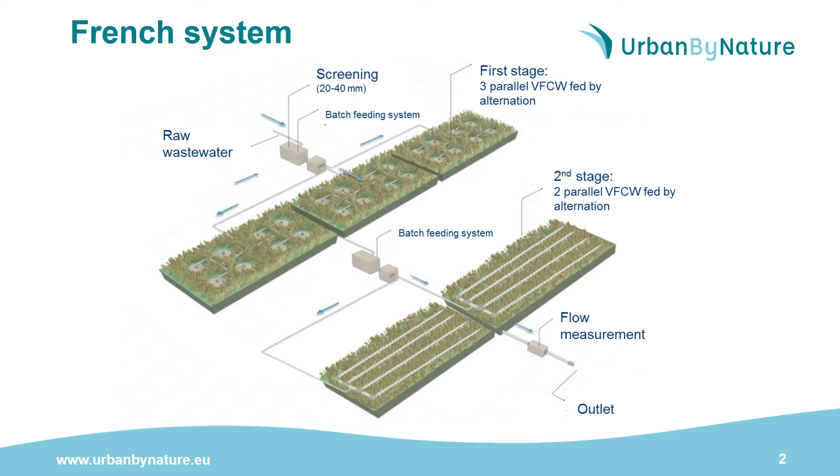So there are more than 5,000 systems in France working for communities, with more than 30 years of experience for the oldest one. One of the particularities to manage these organic deposits that develop on the first stage is that we need to alternate between feed and rest periods to be able to mineralize the sludge. And so in temperate climate, where we have 3 filters in parallel, we will have 3 days and a half feeding and 1 week of rest for each filter.

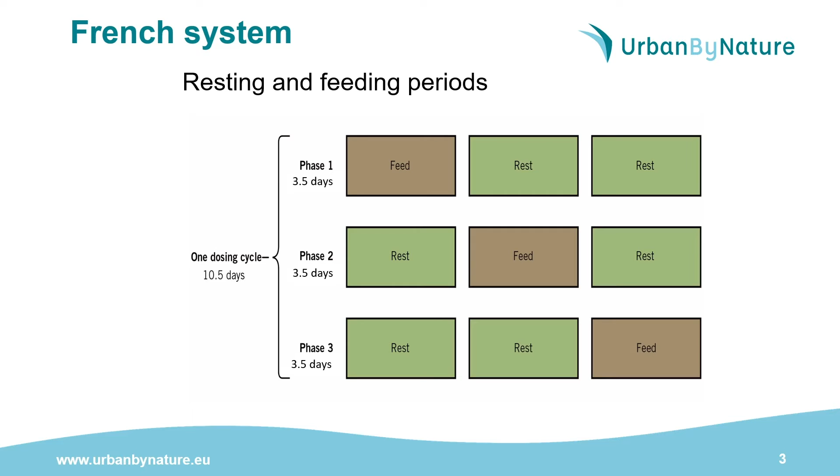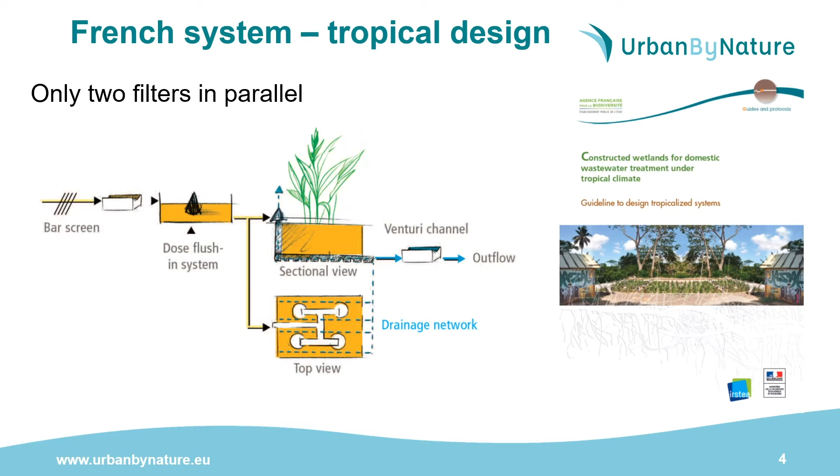But in tropical climate, there are only 2 filters. As you can see in this figure, thanks to the warmer temperature all the year, we can decrease the surface of the system. Even if performances will be higher than in temperate climates, if we do not have too stringent outlet requirements, we can work with only 1 stage in many cases. So there is a guideline about the different variants of French system in tropical climates that you can download on internet.

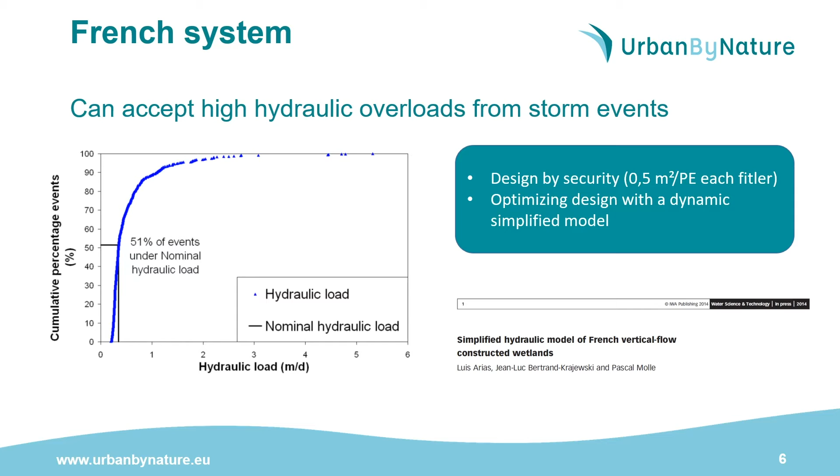So to design the system to accept hydraulic overload for stormwater events, we can have a security factor, that means increasing by 25% the surface of each filter to accept huge load, or we can optimize the design with a dynamic simplified model that you can find in this publication that will allow us to better shape and design the filter.

What is very important is the particle size that we will implement in each filter. So there are different layers. A first layer which is important for the treatment, and then a transition layer and a drainage layer. And for the first stage, as we are working with raw wastewater, we need to work with specific materials, which is gravel, not too tiny, not too big, to be sure that the organic deposit will stay on the top, not too much inside the filter, and that aeration will be good enough to ensure aerobic condition for biological degradation. So basically on the first stage we are working with gravel, 2-4 millimeters, 2-6 or 3-6 millimeters, but not smaller and not bigger.

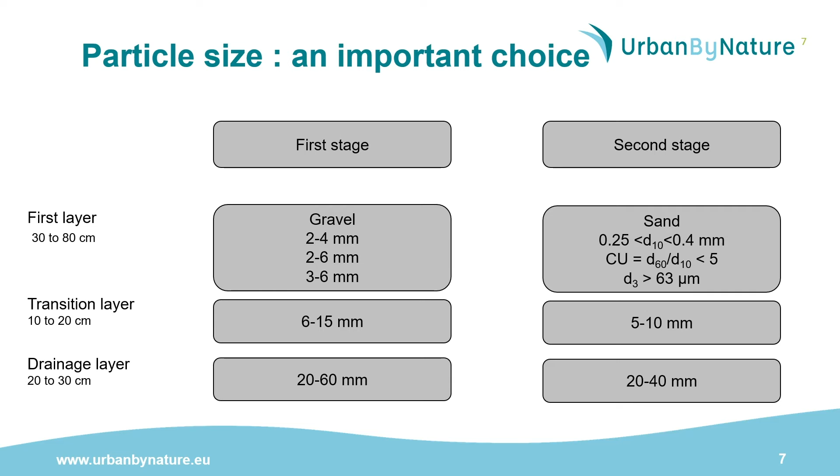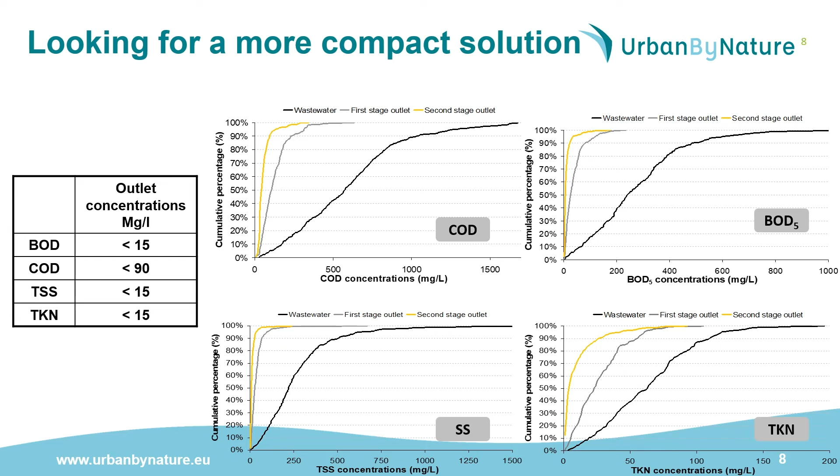The question we had behind that is: is it possible to improve a little bit the efficiency of the first stage to be able to work without the second stage? Because sand is sometimes difficult to find locally, and as well to decrease the footprint of the system and decrease the investment cost of the system.

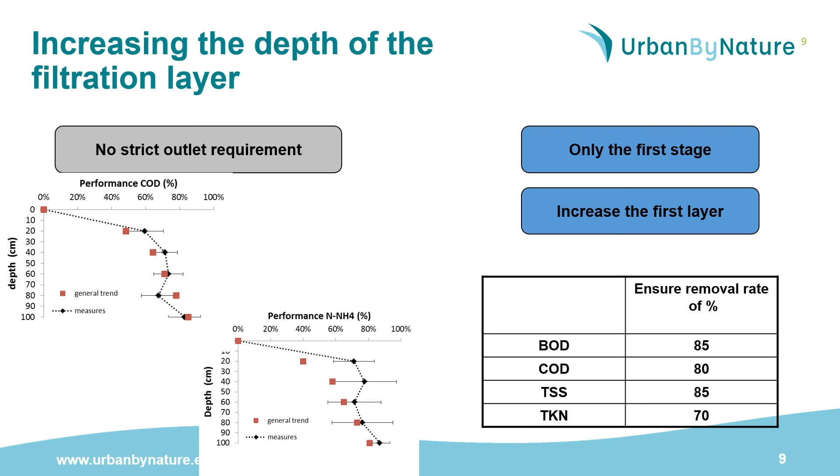So what we can do to improve the performances is increasing the depth of the filtration layer. And what we can see here is that performances for COD, dissolved COD and ammonia increase with the depth, but the main part of the treatment is done in the first 30-40 centimeters of the filter. And so if we increase the depth, we can improve a little bit or decrease the variation at the outlet, but not so much. So if we go to 90 centimeters of filtration layer, then we can ensure those performances for the first stage, but it's maybe not enough according to the context.

Another possibility is to make a recirculation from the outlet of the system to the inlet, and so we will increase the hydraulic load, obviously, but we will have a dilution effect in the effluent. And what we observe is that the performances of the filter itself stay the same as long as the hydraulic load stays below 70 centimeters per day.

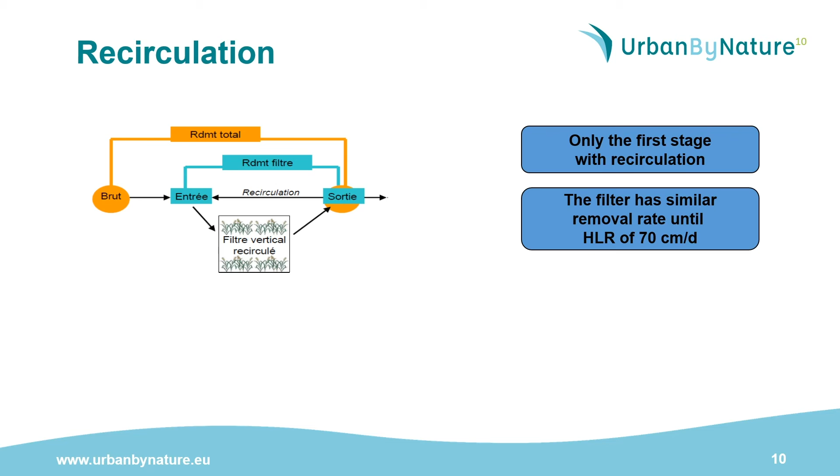If we design a system with 1.5 square meter per PE for the whole first stage and 100% of recirculation, then we can improve the performances of the whole system.

And here you have on the left a figure that presents, according to the inlet concentration, what we will get for Kjeldahl nitrogen at the outlet according to the inlet concentration and the recirculation ratio. So you can see, for example, if you enter at 80 milligrams per liter of Kjeldahl nitrogen, the black line in the middle, then if you do 100% recirculation, you can reach almost 20 at the outlet. But there is a zone that you do not have to go.

It's when the hydraulic load is higher than 70 centimeters, because in that case you have a clogging risk on the long term. But thanks to recirculation, you can ensure this outlet concentration, which is quite good in many contexts, but obviously nitrification will not be full. And as well, recirculation means electricity on the site.

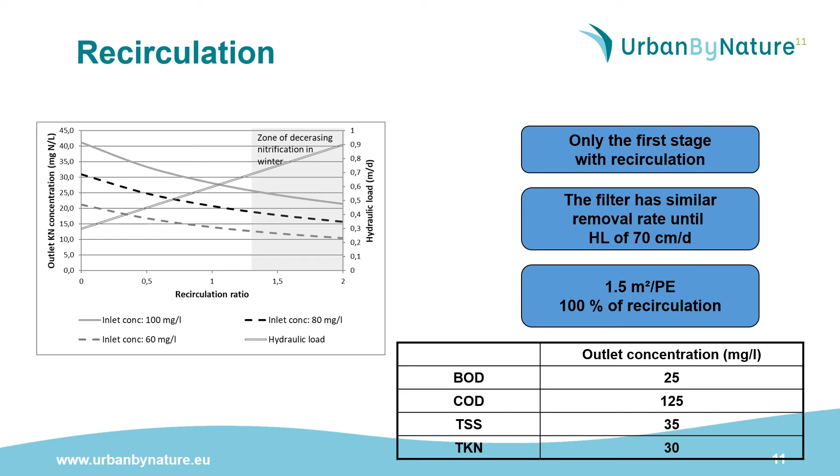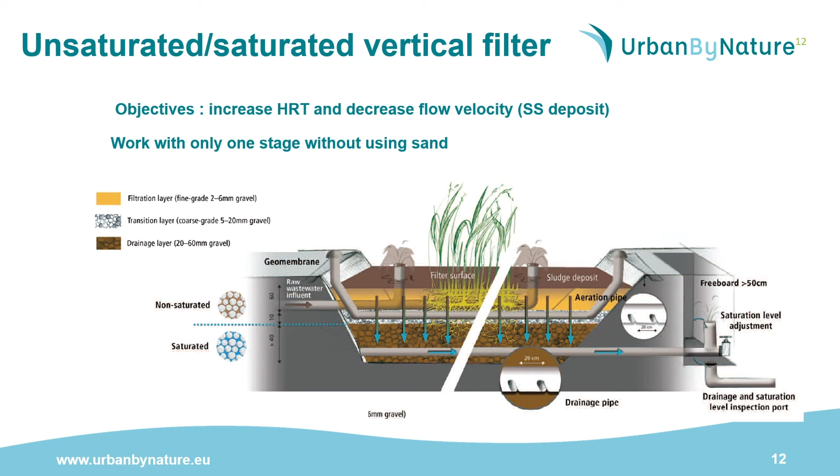If we want to work without electricity, another possibility is to work with a vertical flow system, unsaturated on the upper part, like a classical French system, but saturated on the lower part, with an increased drainage layer depth. Thanks to that, we will reduce the water flow velocity in the saturated layer, and so we will increase the solid entrapment in the system, and as well we will implement an anoxic zone where denitrification will occur, and then we will consume carbon as well for denitrification.

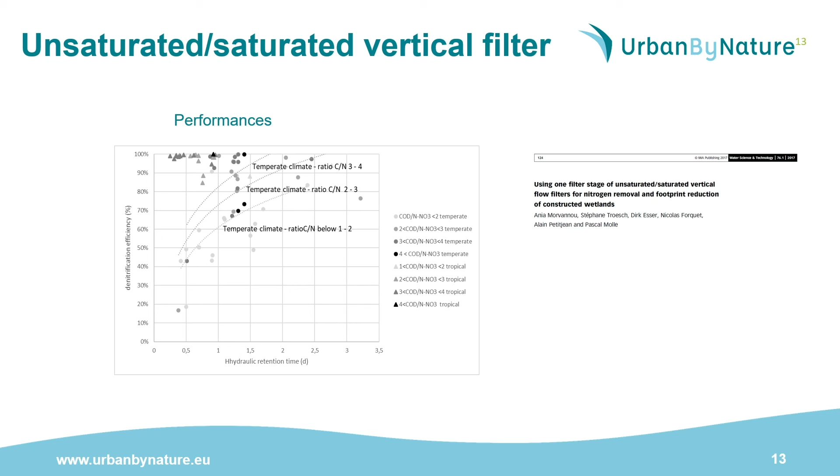So here you have a graph that represents the denitrification efficiency we can have according to the hydraulic retention time in the saturated zone, and according to the COD/nitrate ratio that arrives in this anoxic zone. You can see that the higher your retention time, the better the denitrification performances. And the higher the COD/nitrate ratio, the higher the performances. What we observe is that in tropical climates, denitrification is really fast and efficient, so we are not obliged to implement huge retention time in the saturated layer.

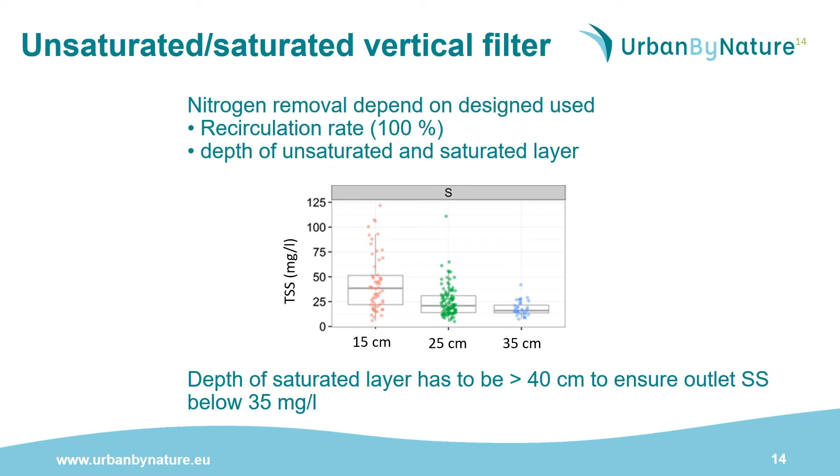So here you have an example of what we can observe for solids. That means we need to implement a saturated zone of at least 40 centimeters to ensure that solids at the outlet of this stage will be below 35 milligrams per liter. Then here are the performances that you can ensure with the system. It's really high for BOD, COD, TSS for only one stage of treatment.

But for nitrogen, it will depend on the depth of the filtration layer of the unsaturated zone, the depth of the saturated zone, and whether you implement recirculation or not. If you implement recirculation with a high unsaturated layer depth, then you can reach up to 90% nitrification. But in that case, total nitrogen removal will be low, around 40. And if you want to optimize TN removal, then you can go up to 70%, but not more, because in that case you will have less nitrification.

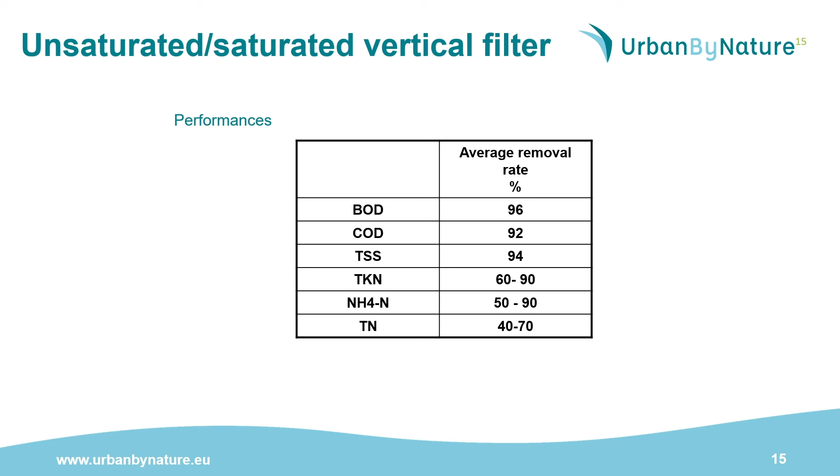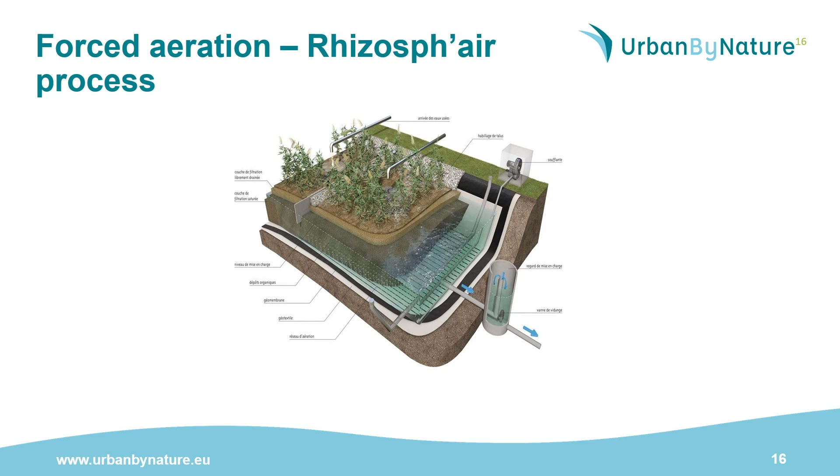It works as two filters in parallel, with the separation in the middle, but the separation is only for the unsaturated layer. When we feed the system, we have first a mix of vertical and horizontal flow in the saturated layer below, and then in the secondary filter, which is at rest for the upper part, we'll have a horizontal flow system.

As we need to manage the sludge, we need to make alternation, and with alternation we feed the other system. To ensure that we use the whole saturated layer of the system, we close the electrovalve close to the filter which is fed, and open the other one at the opposite to force the water to go to the opposite side of the filter. So it means electricity.

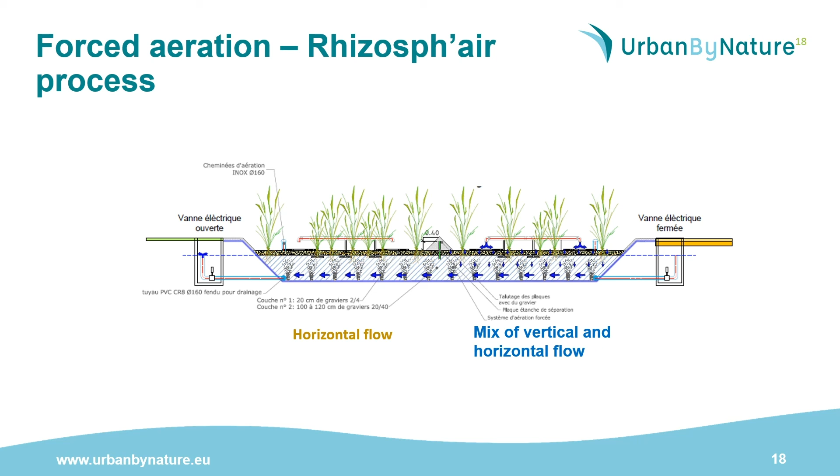It's a little bit more technological, but it's only a one-stage system, around 1 square meter per people equivalent, and thanks to that we can reach a very high level of performance. For COD, BOD and TSS it is very high, and outlet concentrations are very often close to the limit of detection for these parameters. We can do full nitrification just with enough aeration.

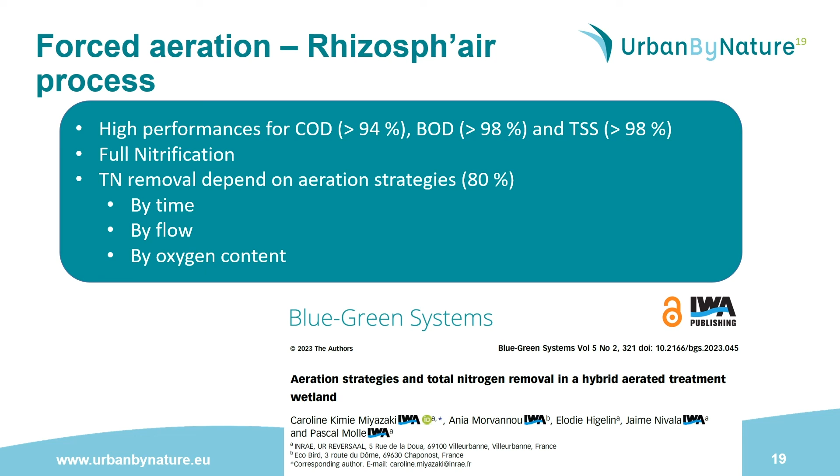For TN removal it will depend on the aeration strategy. If we do it by time, then we can reach 70% removal for TN. If we do it by flow, then we can reach up to 80% removal for total nitrogen. And we are actually working on controlling aeration according to oxygen measurement in the system, and in that case we expect to go even further.